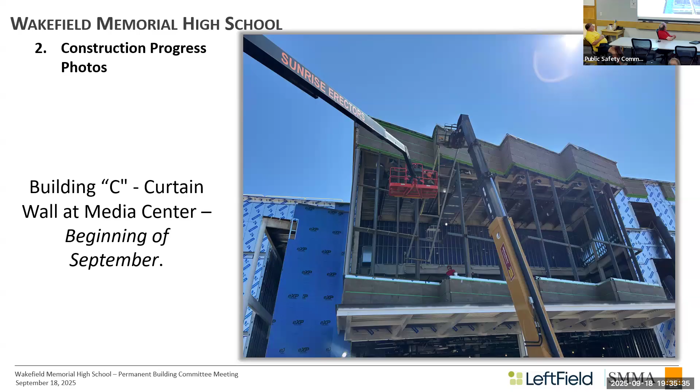This is a picture of the curtain wall going in at what we call the sawtooth. It's the main entrance, and above it is the media center.

This is just a picture of both the sheathing and AVB going in on building D, the gymnasium, and below it is the locker rooms and those other multi-purpose areas.

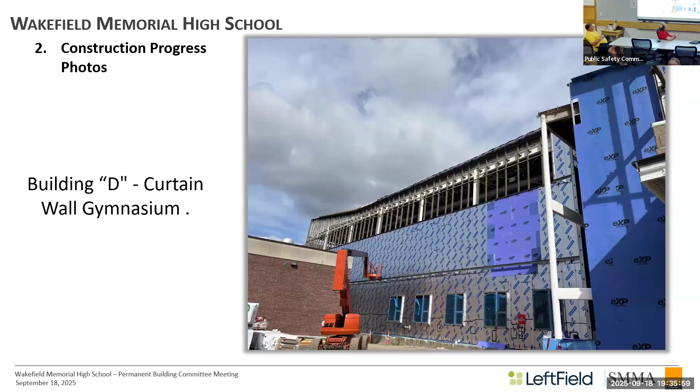This is a photo of the roof screen that started going in this week. That one is just a visual screen. The acoustical one is on the other side.

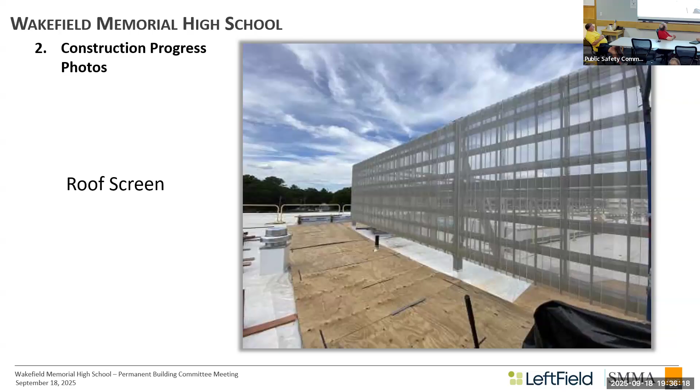This is building D, first floor fitness studio framing. Just wrapping up the interior framing, and then we'll get into the wall stuff.

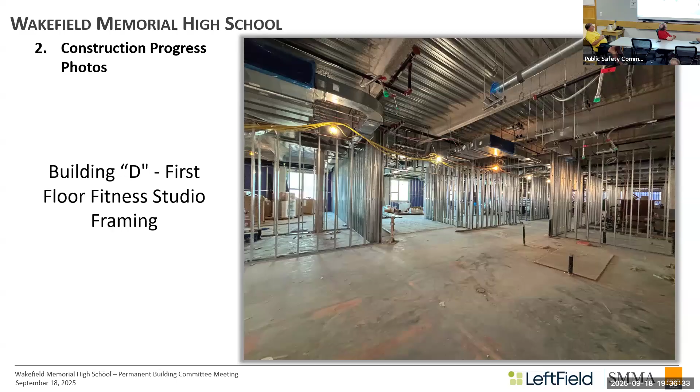Next photo is fireproofing, the loading dock area in building F.

Building F, placement of slab on grade, don't know what that is. So this is—

I'm in trouble, that picture doesn't match. Yeah, yeah, that doesn't match. No, it doesn't, yeah, it's not the auditorium. But you can see it's above ceiling going in—we've got duct work, we've got mechanical piping. It's that building.

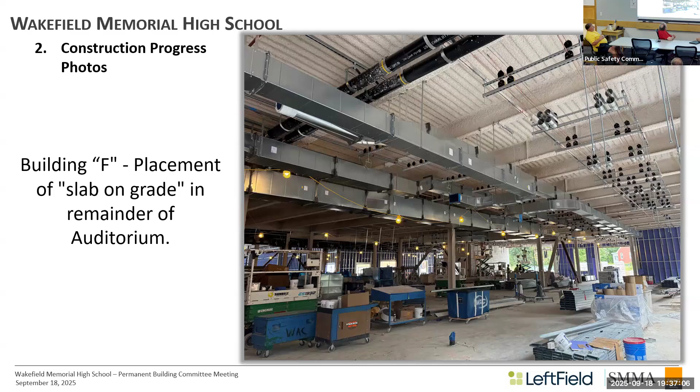This is a big deal for us. This is the CMU walls getting built around the main electric room. We're trying to get this built as soon as possible so we can get the gear in, get it secured, and get piping and wiring out to the other sub electric room so we can start obtaining permanent power.

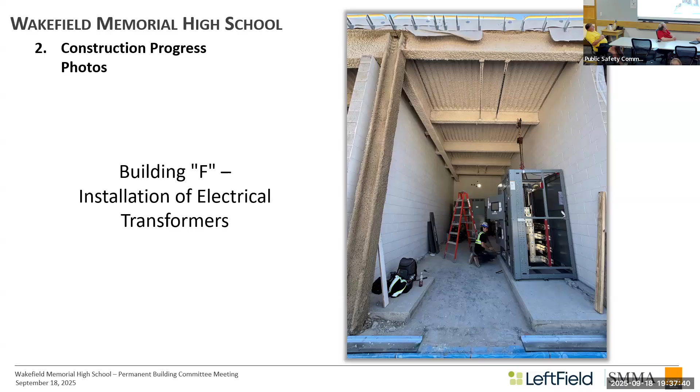That's the switch gear, not the transformers. Main switch gear. We have the transformers? Yes, they're set up outside. So they're provided by Wakefield? Yes, we have all of it.

Schedule update, masonry: brick install continues on the first levels of building A and B. They're also up on the roofs in buildings D and F getting that brick done, so we can clean that up and get the permanent roofs on.

Roof work: we're working on installation flashing and install on the lower roof of E, which is above the music rooms. As you see in the photos, the roof screen started going on buildings B and C.

Curtain wall and window framing in various locations—we're just trying to get the building buttoned up.

We have multiple stairs on site right now. We're going after D3 right now, then E1, and finally D1.

Major drywall framing and taping is in progress in buildings A and B, and you saw the framing on D and F. The high walls in the auditorium have also started.

We're trying to get those up, get them sheathed and taped, so we can bring in the dance floor to allow above-ceiling trades to have a safe place to install.

The acoustic barrier ceilings have started. We're hanging those first, and then we'll follow up with Unistrut, and then let the MEP trades come on after that.

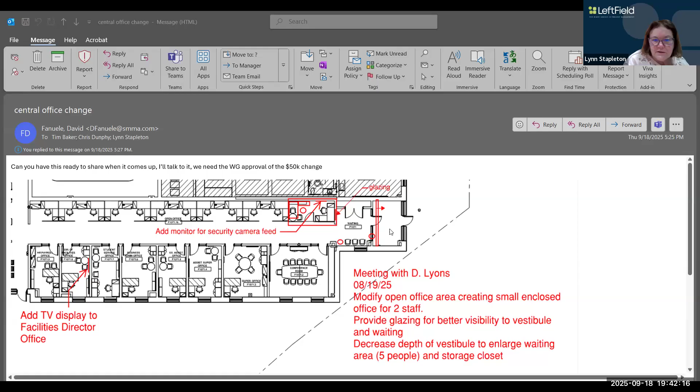Sorry, I was on mute. This last issue has to do with the central office. There was a request during the programming meetings to enclose 2 of the open cubicles into one office at the front, because they make sensitive phone calls and need privacy. So they've asked that those 2 desk stations be put into an office, and they want visibility of the waiting room so they can monitor it during the day. SMMA put this together.

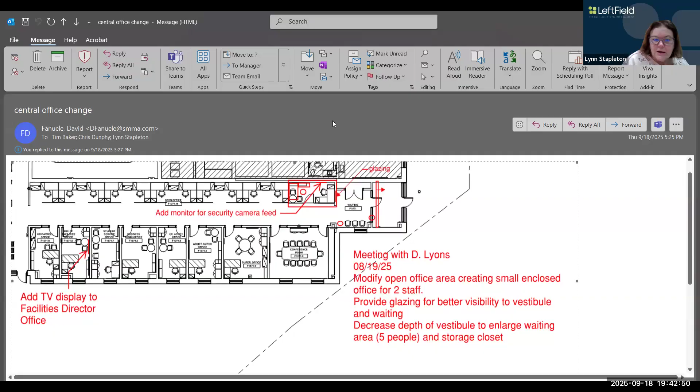Bond gave a tentative price to it, but SMMA is looking for direction on whether or not to proceed with doing drawings so that Bond can put a hard price to it.

My understanding from this afternoon is that we're looking at about $50,000, and it would come out of the soft cost contingency. Lynn, first of all, we have no idea whether it's 50 - there's just been guesstimates, so I wouldn't even think about what the number is gonna be until we actually give them real drawings. So what they're looking for tonight is approval to do real drawings to get real numbers.

But if we do decide, Lynn, to go forward with something like this, where do the funds to do it come out of? It would come out of the construction contingency, the supplemental money that we have - the GMP.

So my understanding is that this had always been an area that was talked about in programming, and this is the final discussion from all those conversations. So there's electrical, there's HVAC, there's window glazing, lighting, fire protection - all sorts of interesting things.

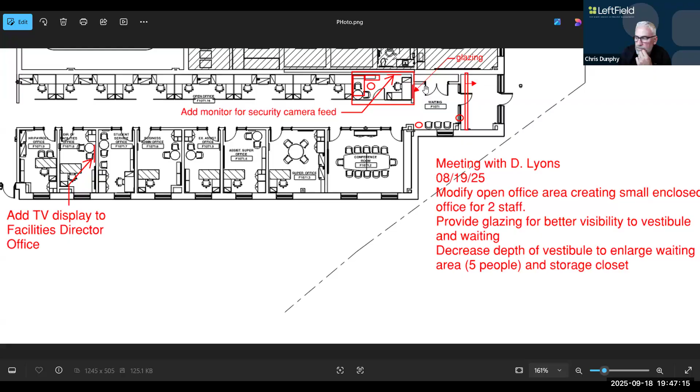All right, there was one other request from the school department. Crossing guards.

The request is made of Dr. Lyons, who indicated that last year, at the beginning of the project, we approved a month of crossing guards for the area. The school department then submitted the bill for the crossing guards as a reimbursement, but MSBA will not allow you to do that. They won't allow you to pay reimburse.

It's the town paying themselves, this type of thing. So the school department paid for the crossing guards for the rest of the year. When it was first worked on, the contractors were getting there at 7. Correct me if I'm wrong here, Marcus. Shortly after that, due to their experience, the subs and everybody started coming at 6.

There was a safety meeting last month, about 3 weeks ago, and this crossing guard issue came up again, but what didn't come up was the fact that the contractors were showing up at 6, not 7, so there was no great conflict with them with the drop-offs at the school. But Dr. Lyons requested 40,000.